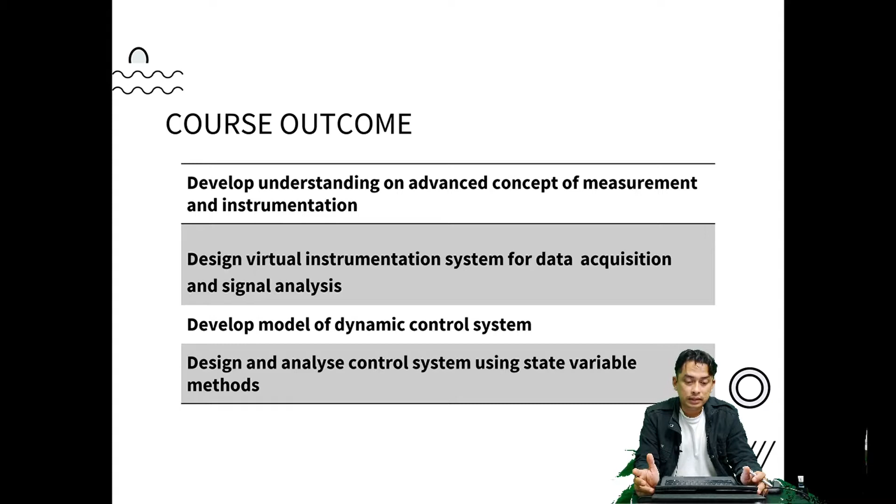Alright, let me go straight to my first lecture, my first part. I'm going to explain about measurement and instrumentation. Of course, from the topic, we see there are 2 parts here: the first is measurement, which is more abstract, and the next is instrumentation, which is more about the hardware. So at the end, I hope all the students not only understand how to do measurement, but I'm also expecting you to be able to develop your own instrumentation.

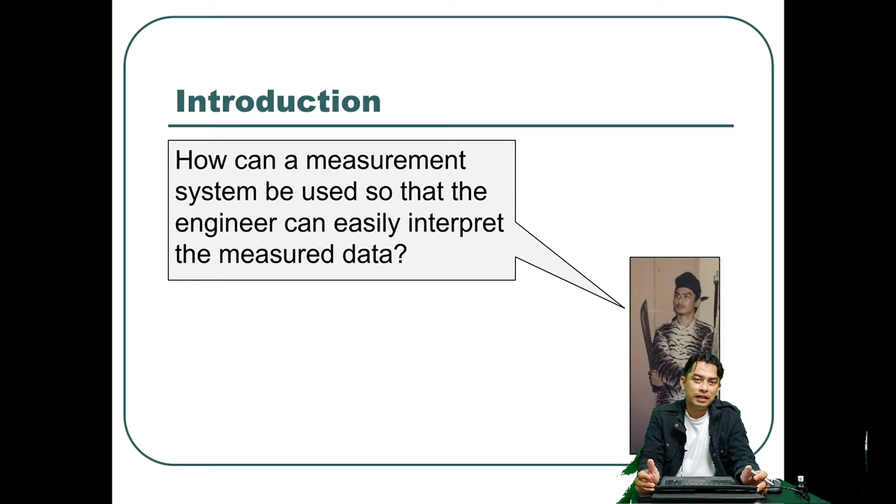Alright, so we do measurement almost every day, every time, every second. In fact, when I'm sitting here delivering this lecture now, I'm actually doing measurement. For example, I'm looking at the camera, so I'm looking at the light that travels through the air and comes to my eyes. If the light is not so bright, I need to make sure I have sufficient light so that you can see my face. So my eyes are doing the measurement, and then telling the brain to act according to what I see or what I feel. For example, if I hear an uncomfortable sound, I will ask my body to react according to the level of sound that I hear.

That's an example of measurement that us as human beings do. Apart from that, we have a lot of things that we measure: for example, room temperature, distance we travel every day, pressure, room pressure, environmental pressure, body weight, vibrations, velocity, accelerations, and so on.

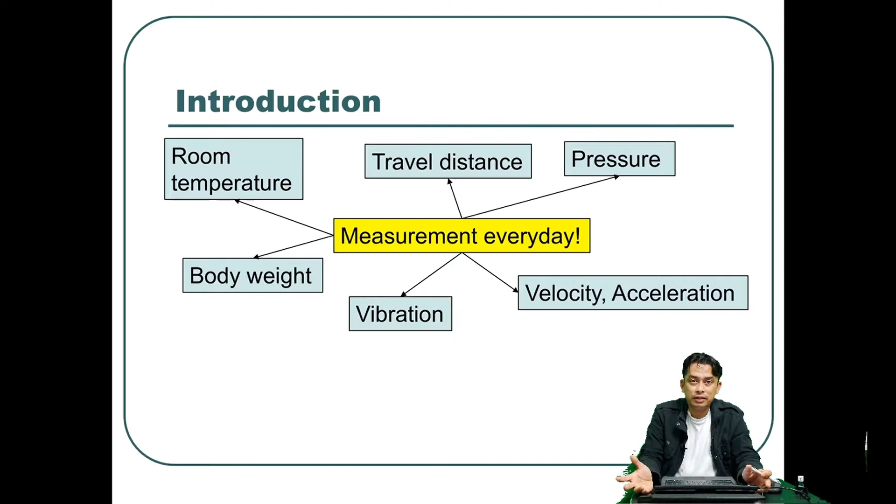So why do we need to do measurement? It is because we want to determine a specific value for the variables that we measure. If we measure length, we need to put a value to the length we measure. If we measure body weight, we need to put some value to the body weight. There are a lot of ways, a lot of units that we nowadays use for measurement, but later on we see there is actually a conversion we can use to convert between one unit to another. So after determining the value, we can understand the relation between one parameter we measure and another parameter, and also understand how the variables we measure react with time, or how they react with the location or space, the area where the measurement is done.

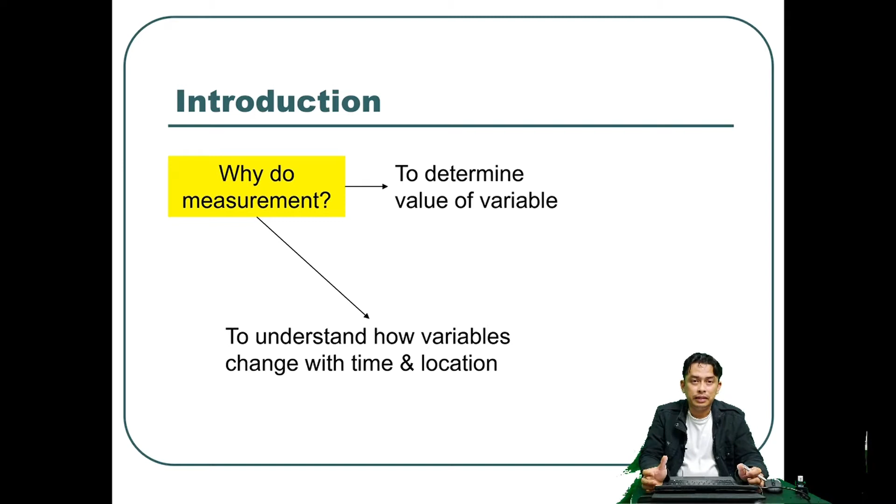So what is actually a measurement? It is an action, the act of assigning a specific value to a physical variable. This is the keyword: physical variables. So measurement is actually a tool to help us gain quantitative information, not only qualitative. I hope all of you can understand what is quantitative and what is qualitative. Qualitative is more abstract, for example dark and bright, hungry, full, sweetness, bitterness—these are qualities, qualitative. So for example, sweetness: if you want to make the sweetness become quantitative, we must put some numbers to the level of sweetness.

For example, if we drink coffee or we drink tea, we develop the value, the sweetness value, so that all of us in the whole world can understand. If you put 10, it's so sweet. If you take 5, it's just a mid level of sweetness. Although this is abstract, some people think sweet is this level, and some people feel this level. But if all of us in the world can have a convention on the level, then we can do

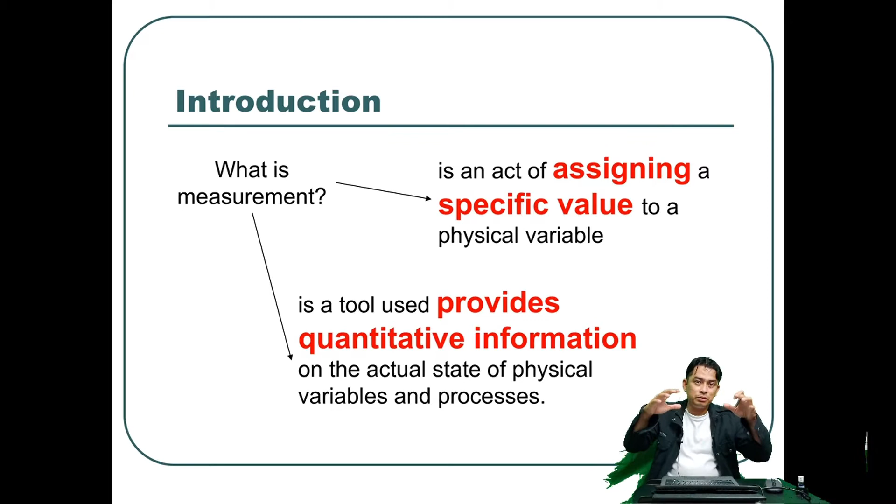a measurement. For example, for the length of 1 meter, everyone in the world understands that 1 meter is about this length, and then we have a standard for that. So if you want to understand or imagine what 10 meters is, you just multiply 1 meter by 10, so that people can have a spatial awareness of the space that they are in.

So there are a lot of applications that we can discuss, but I want to touch on them only a little. You can read it by yourself. For example, we apply the measurement system to process. In a factory, the factory will do some process to manufacture something, so we need some kind of measurement to make sure that the process is efficient and achieves the limit. The measurement system is also applied for control of operations, and also for simulation.

I mean, especially for the boundary condition, the first setting before we do simulations. Or if we want to do an experimental study, we need a lot of measurement to measure our experiments, because, if you can remember, one of the reasons we do measurement is that we want to understand the relations between one parameter and another, this physical variable with other physical variables.

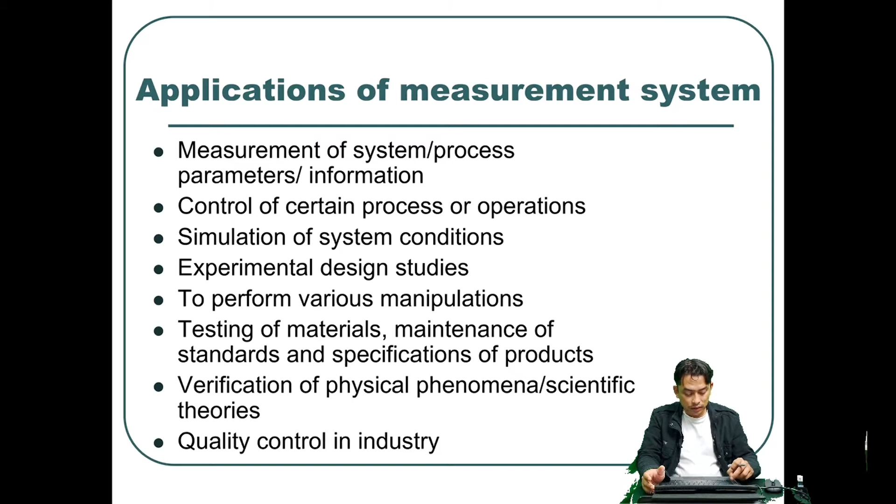And then I'm going to discuss the basic functional elements for an instrumentation. There are 4 basic functional elements. First is the sensing element. The second one is the signal conditioning element. The third one is the signal processing element, and the fourth one is the data presentation element. All these elements I will explain step by step, starting with the first one, the sensing element.

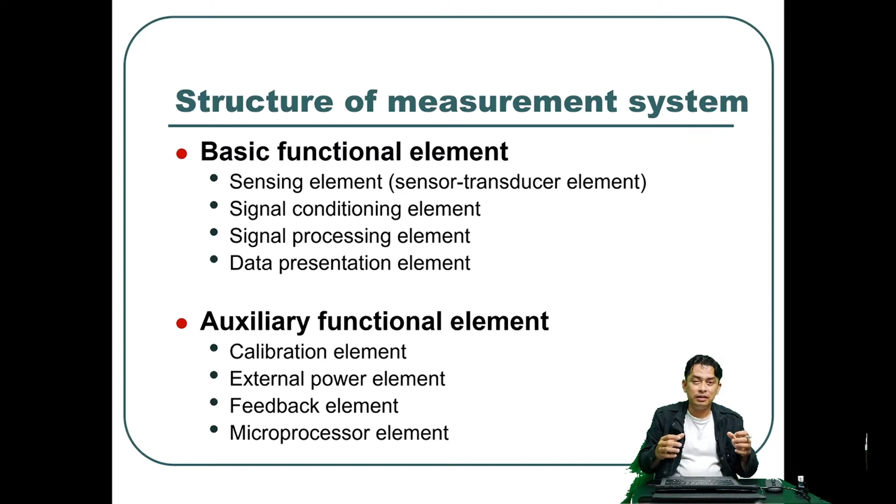Besides the basic functional elements, in the measurement system you also have an auxiliary functional element. It is an option. We don't have to put auxiliary functional elements in the measurement system, but in some applications, if you put the auxiliary, the system becomes more useful, or it can increase the precision and level of accuracy of the system. But I will explain the use of auxiliary elements later in the coming slides.

Okay, as simple as a ruler. A ruler itself is a measurement system. The input is the physical length that we want to measure, and the output is what we see on the scale of your ruler. So this is the output. We can observe that straight away.

The 4 basic functional elements that I discussed earlier: we have the sensing element, signal conditioning element, signal processing element, and the data presentation element. All of them are arranged in line. It should start with the sensing until the data presentation. The flow must be in that sequence. We cannot change the sequence.

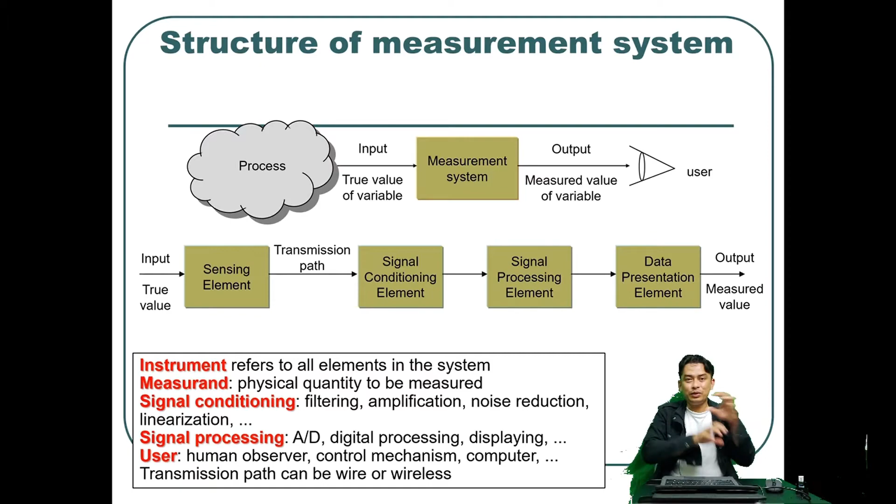Alright, so if I put these basic functional elements in terms of something that we usually see in the real world, it looks like this. We have a physical quantity, for example force, velocity, pressure, displacement, temperature, flow, acceleration, strain, current, voltage, frequency, pH value, humidity, and so on. All these physical variables will be input to our measurement system, which always starts with the sensing

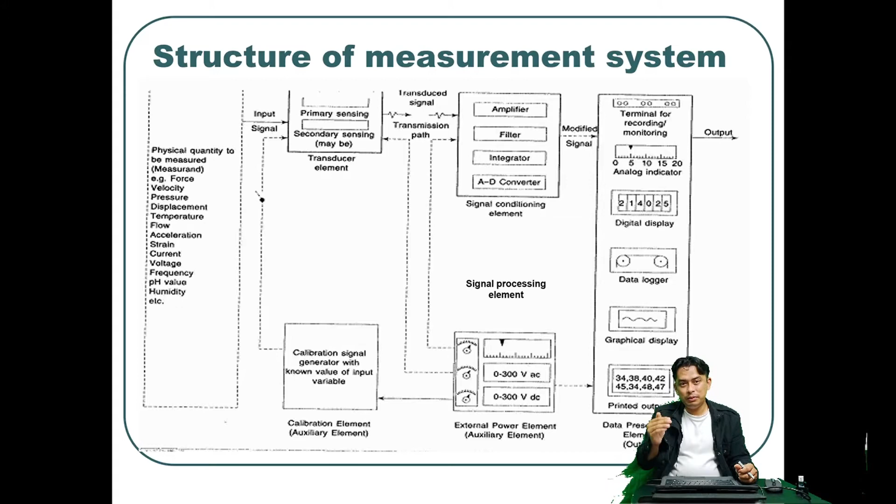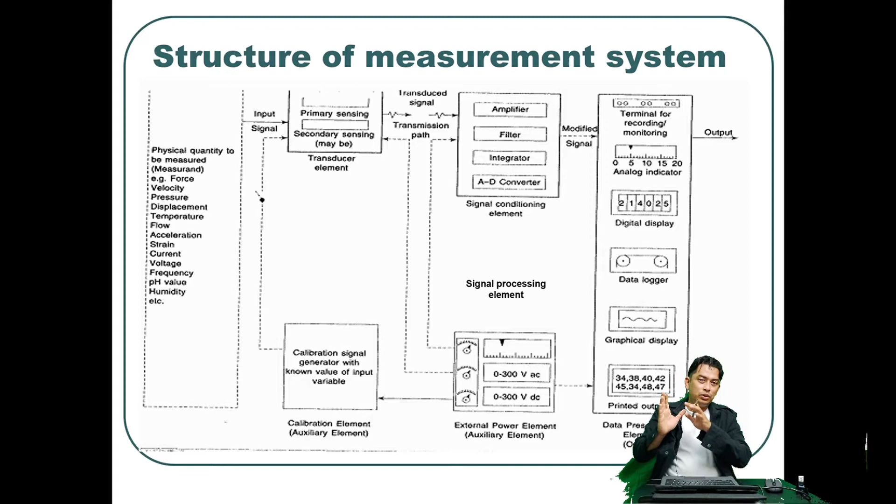or transducing elements. For the sensing element, usually we have 2 parts, which are primary sensing and secondary sensing. I will explain what primary and secondary sensing are later when we visit the sensing element part. After the sensing element, you go to the next stage, which is the signal conditioning.

Basically, in the process of signal conditioning, there is an amplifier, a filter, an integrator, and an A to D converter, which is the analog to digital. This is where the analog signal is converted into a digital signal.

And then after the signal or the information from the sensor is conditioned, or we should say is modified to make sure that it is in a better view, for example, if the voltage from the sensor is small, when it passes through the signal conditioning, the signal will be bigger. So the amplification process is done during the signal conditioning.

So after signal conditioning, the signal will go to the next stage, which is some process using a computer. If you're using a computer or a microcontroller, it will go through the signal processing element, and after that we go to the data presentation, either in terms of display through a large monitor, or just showing the scale, such as the ruler that I discussed earlier.

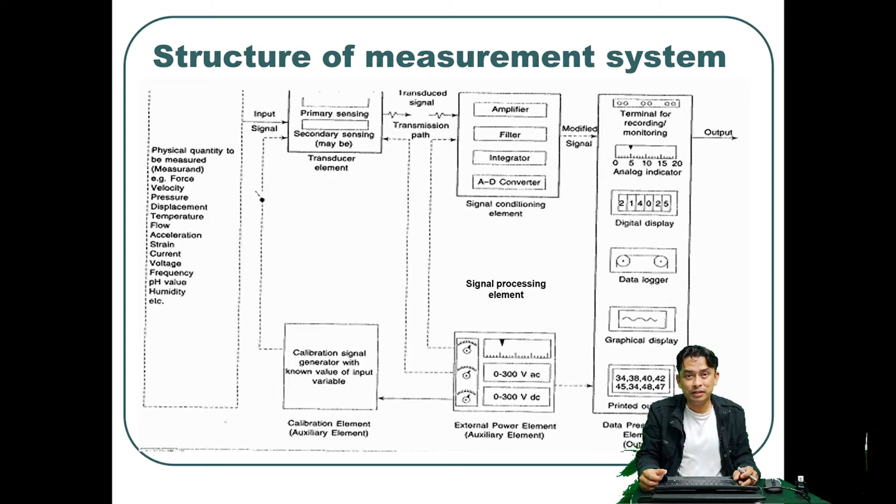So the first part in the basic functional elements is the sensing element. In layman's words, this is the first surface that touches the physical variables, the part that acquires the signal. An example of a sensor is the thermocouple, which senses the change of temperature and converts it into a change of voltage.

And the other example that I listed here is the strain gauge. It measures the change of strain and gives information in terms of resistance change, which is later converted into voltage. So these are two examples of sensing elements that we frequently use in mechanical engineering.

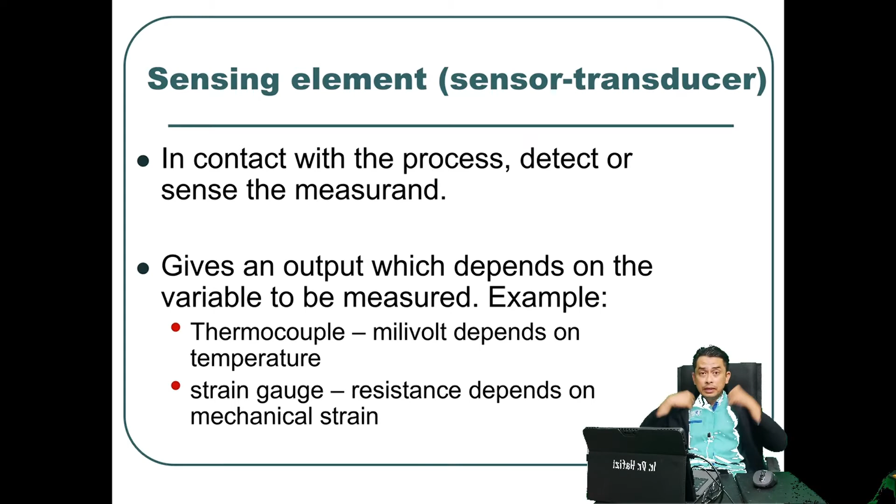The sensing element that is mechanical based or gives a mechanical output, for example, the deformation of structures, the spring movement, the diaphragm movement, all these are mechanical output sensing elements. This we call a primary sensing element. For sensors that have primary and secondary elements, the mechanical output sensing element is the primary sensing element.

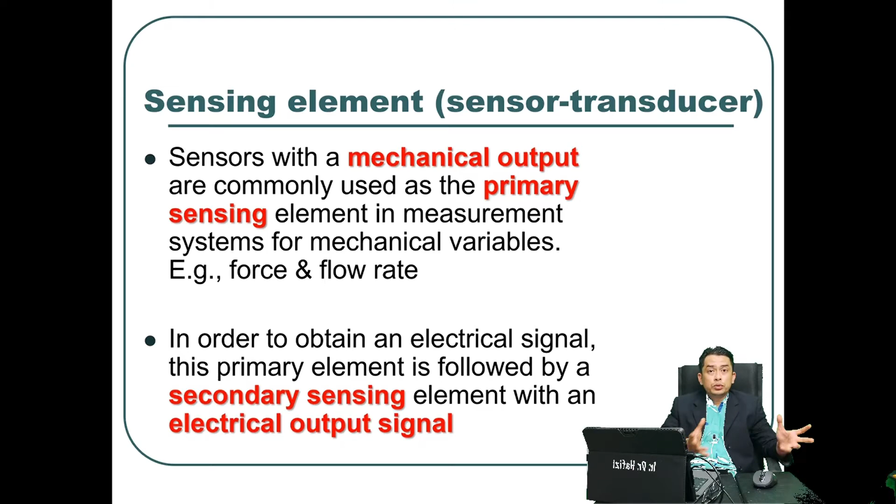Not all sensors can be considered primary or secondary, because some sensors only have one type of sensing element. The secondary sensing element is the electrical based output, the sensing part that gives the electrical output. Usually this secondary sensing element is in sensors that need to be connected to a computer, microcontrollers or any other digital device.

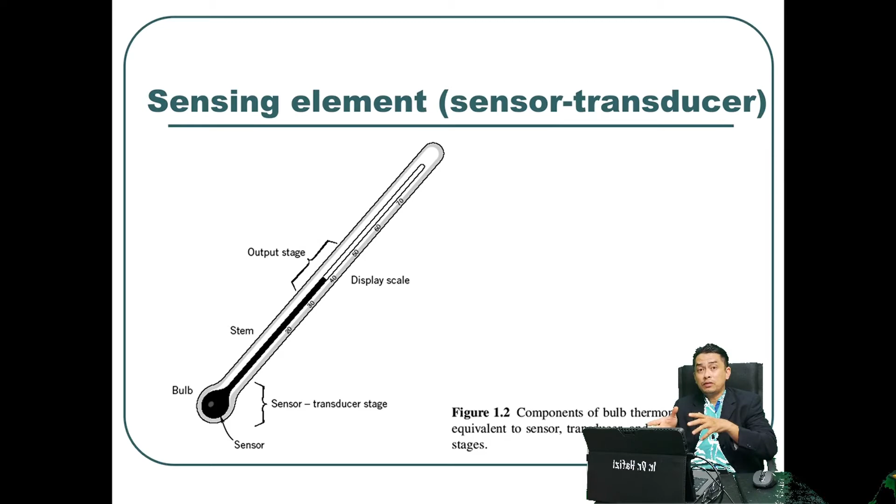When we talk about the sensing element, there is a list of desirable characteristics for a transducer element. It is a very long list of desirable characteristics, but I will touch only a bit that I think is very important, because these characteristics differentiate between an accurate sensor, an expensive sensor, a cheap sensor, and a very precise sensor. So this depends on the desirable characteristics that a certain sensor has.

Okay, so the first one I want to discuss here is that the sensor should only recognize the desired signal, the desired input. For example, if the sensor is intended to measure strain, then strain is the only thing the sensor can measure. If you want precise, accurate sensors, go for sensors that are sensitive to the desired input only.

And then another good characteristic for a sensor is that it should not alter the event to be measured or the state of the physical variables to be measured. For example, if you want to measure temperature, we put a sensor. That sensor cannot increase the temperature surrounding the area where we want to measure the temperature. Same goes with pressure. We try to measure pressure, but the transducer or the sensor at the same time increases the pressure.

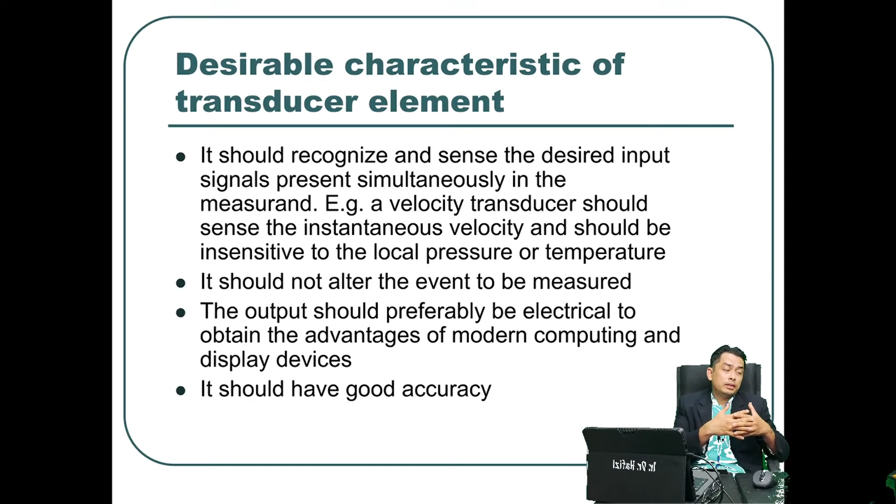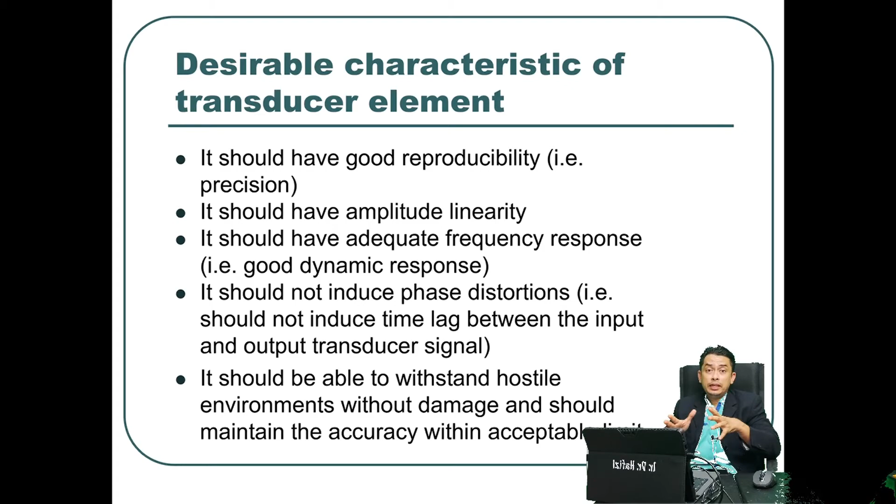The sensor also needs to have good accuracy and good repeatability of the measurement, good linearity, and adequate frequency response, especially for dynamic measurement. And then we also want it to measure in real time. There is no delay when doing the measurement. So the next basic functional element that's very important is the signal conditioning element.

Basically, most measurement devices or measurement systems need to have a conditioning element, because the input coming into the measurement system is usually not in a good form. Usually the signal is embedded with noise, and sometimes the signal is low in amplitude. With signal conditioning, we can either amplify the input or filter the noise.

Also, if you want to use a computer-based system or a microcontroller, the signal that we acquired after the sensor element needs to be converted into a digital signal. For the conversion from analog to digital, we need an A to D converter. If the sensor is mechanical based, the signal conditioning element can be a set of gears or springs that amplify the amplitude. It depends on the design by the engineers who design the measurement system.

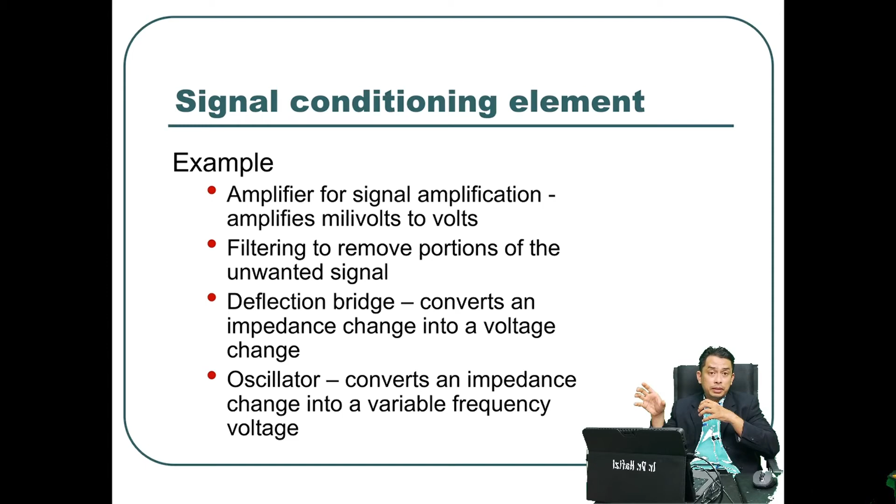These are examples of signal conditioning elements: amplifier, filter to remove unwanted signals, deflection bridge that converts impedance change into a voltage change, and oscillator that converts an impedance change into a variable frequency voltage. There are a lot of conditioning elements, depending on whether the sensor is mechanical based or electrical based. Three things are very important to discuss theoretically in the signal conditioning element: amplification, filtration, and analog to digital conversion.

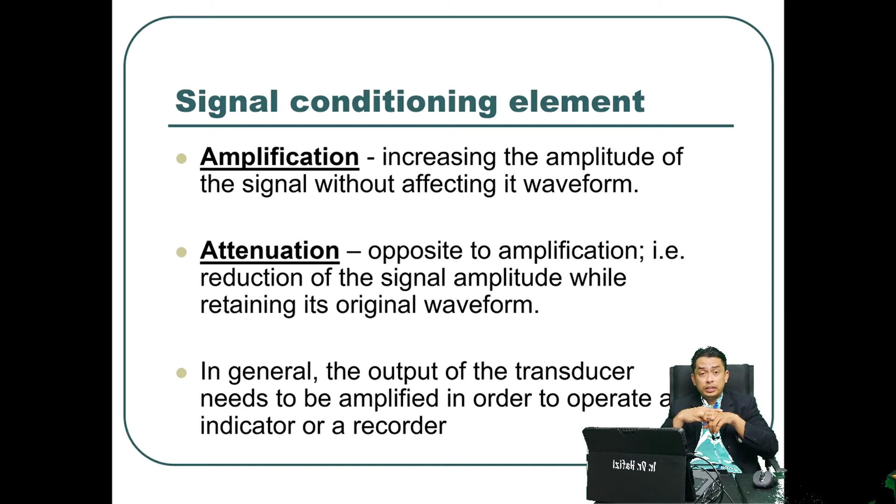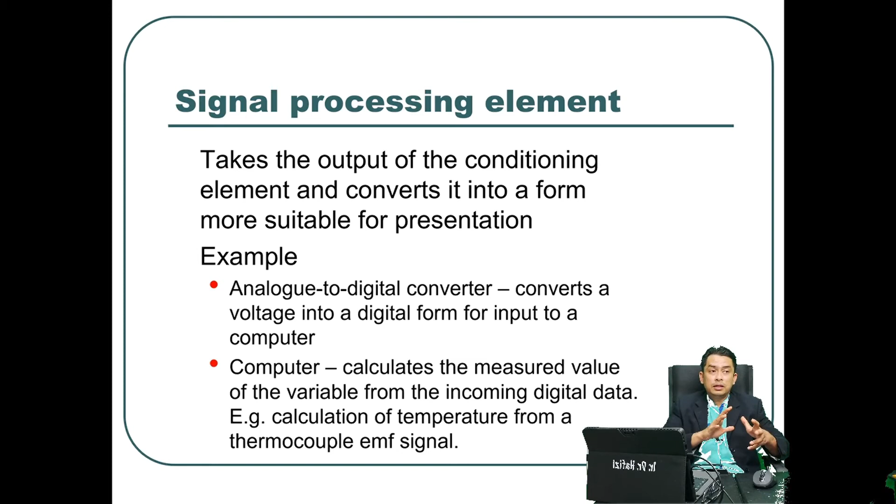The third basic functional element, which is very important, is the signal processing element. This is a critical part, whereby the signal from the sensing element goes to the signal conditioning element. We process it, make sure the signal is clean and has sufficient amplitude, and then it goes to the signal processing element, where the signal is processed to get whatever information we need.

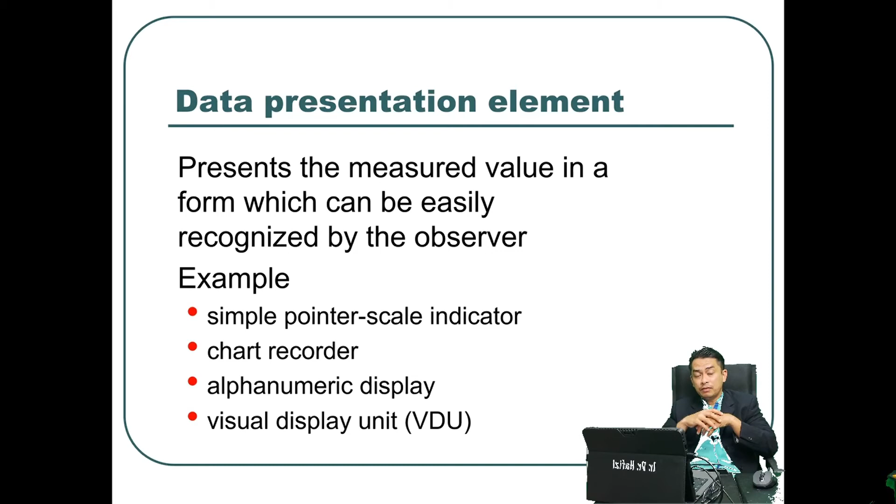The final part of the basic functional elements is the data presentation element. I have shown you in the previous slides a lot of examples of data presentation elements, and I will not go further on this one because it's very easy. You can see a lot of examples available; I have discussed them before. So we have seen the details of each basic functional element for a measurement device.

Now we want to see how the basic functional elements are combined to develop a complete measurement device or system. Look at this slide. There are 4 examples of measurements that we want to develop. Before we design the measurement device, we first have to block the components, since they are compulsory parts of the measurement device. If you look at the first example, which is to measure temperature, we have to know that it must have sensing elements, signal conditioning elements, signal processing elements, and data presentation elements.

Then we plan the flow of the signal. Do we need signal conditioning, or do we need a signal processing element? If we need each of those, we have to plan the components for signal conditioning and signal processing. For this example, we want a digital result in a computer. First we have a thermocouple to convert the physical variable, the temperature, into a voltage reading. Then we amplify the signal if it is low, and make sure there is no noise. In this case the noise comes from small changes of temperature due to environmental change, so we can add methods to remove this noise.

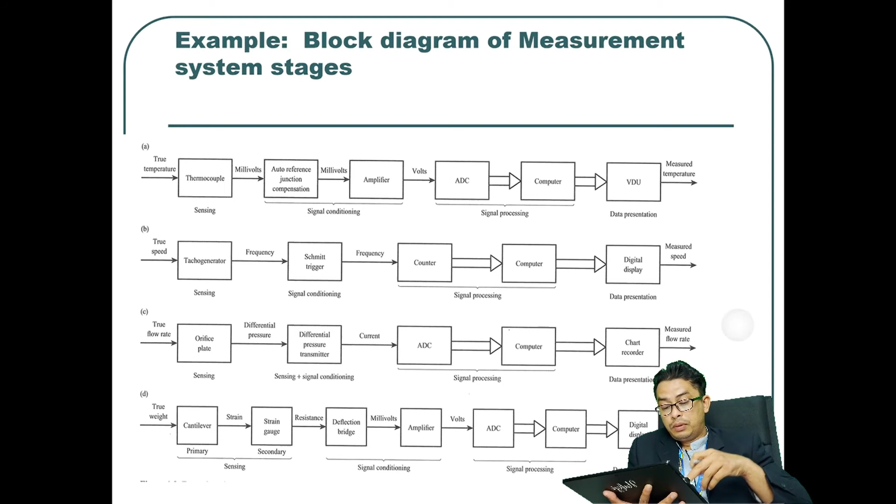There are 3 more examples you can have a look at, but I want to show you this: the physical example of how we can block a measurement device. The slide before was without the physical measurement device.

We have only a planning of how to design the measurement system or measurement device. Starting with a block, we plan the block, and then after that we can design and fabricate whatever sensor that we want.

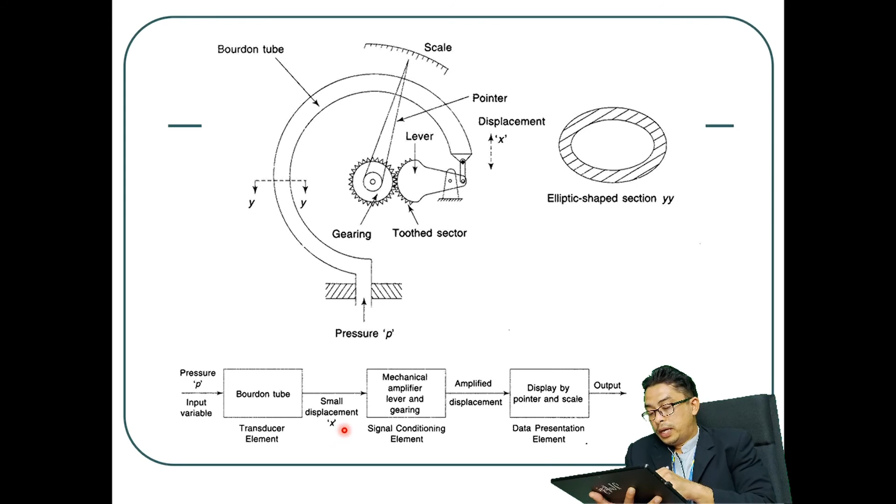If we convert the mechanical based sensor into an electrical based sensor, it will allow us to do real-time big data collection. Usually this kind of electrical based sensor can be used for structural health monitoring in plants and vehicles, and many modern structures and equipment frequently use sensors connected with electrical based sensing.

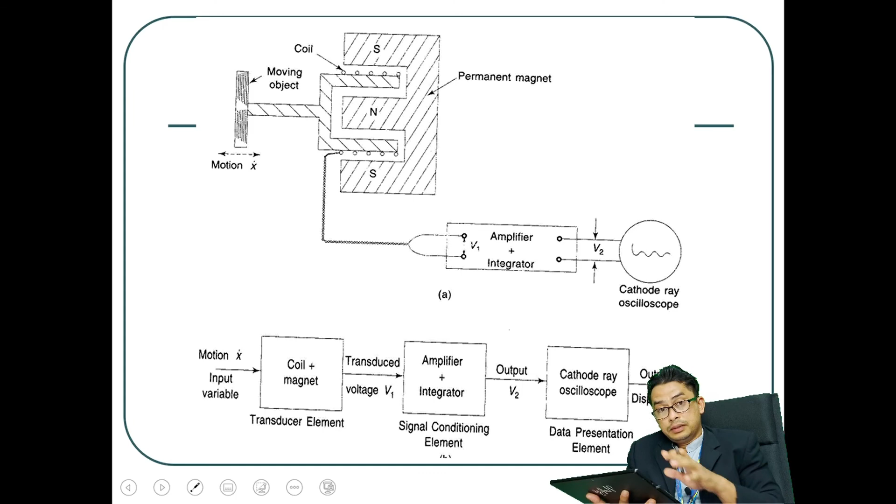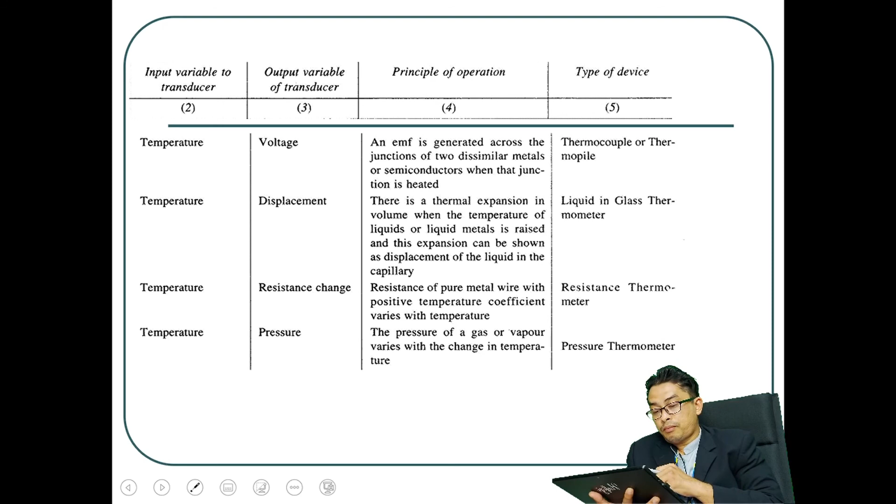There are more examples here in the slide, so I hope you can have a look. Also, I stated in the notes the principle of operation to measure physical variables. Depending on the principle of operation, we can draw the block diagram for the measurement system. I'll go through this, and have a look in the slide — there is an exercise which I want you to do.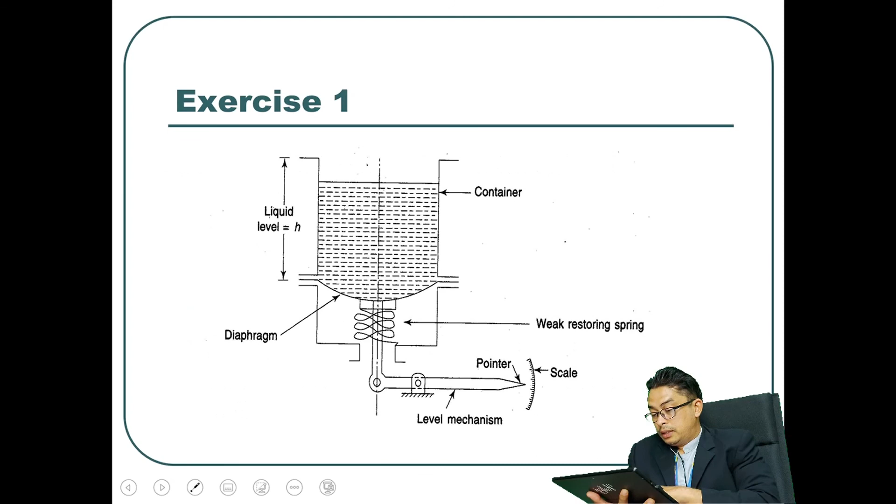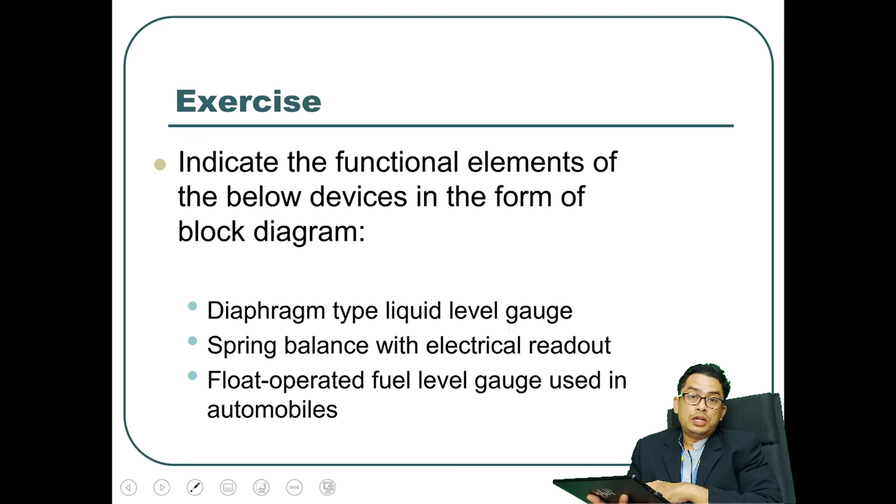This is a diaphragm type liquid level gauge, and the next one is a spring — I think it is a spring balance with electrical readout. The last one is the float-operated fuel level gauge. Have a look — I think it's fully mechanical because we have a gearing system here. So I leave it to you.

These are the 3 example exercises. You do it, and then we will discuss face to face about this exercise. So until now, thank you very much for your attention. I've finished this part, so after this we go to the next topic, which is the measurement concept. Thank you.